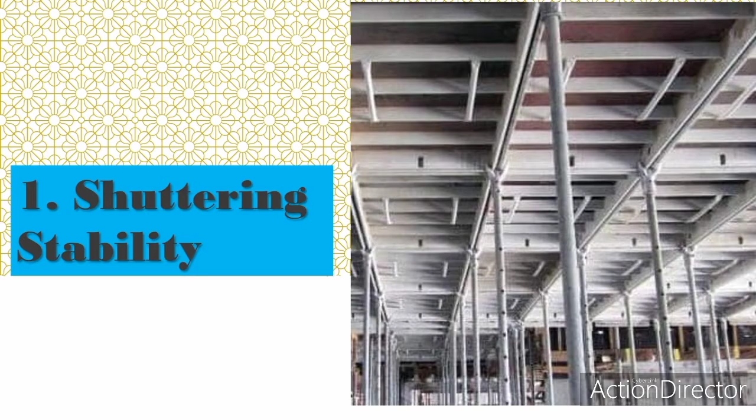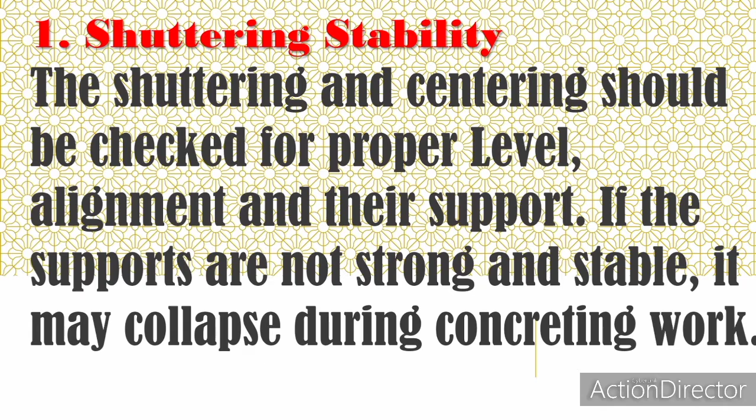The shuttering and centering should be checked for proper level, alignment and their support. If the supports are not strong and stable, it may collapse during concreting works. This can be a serious safety concern and leads to wastage of time and material. Before and during concreting work, the supervisor should observe the stability of all shuttering and centering supports.

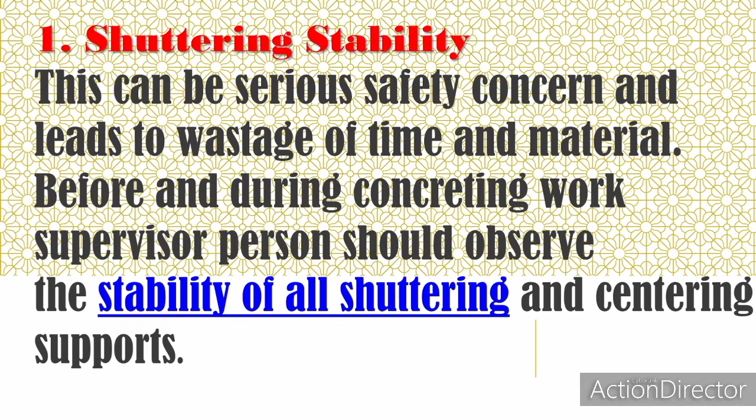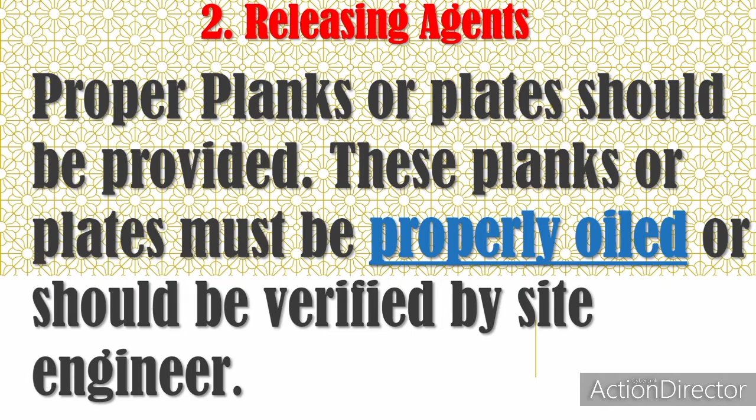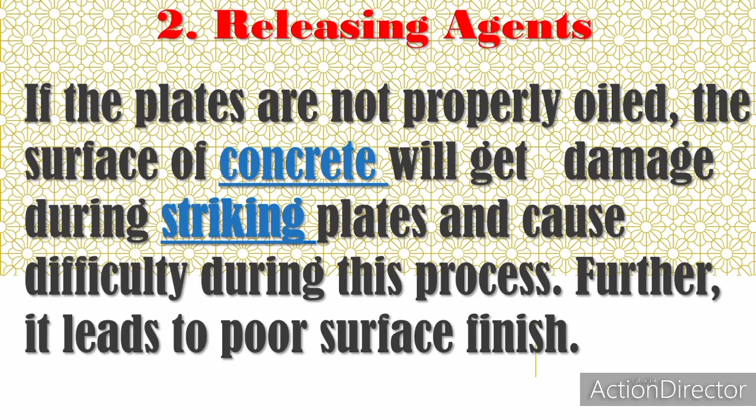Second, releasing agents. Proper planks or plates should be provided. These planks or plates must be properly oiled or should be verified by the site engineer. If the plates are not properly oiled, the surface of concrete will get damaged during striking plates and cause difficulty during this process. Further, it leads to poor surface finish.

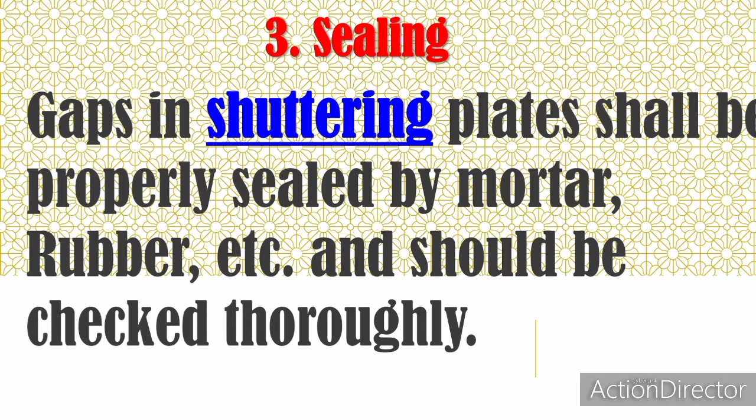Number 3. Sealing. Gaps in shuttering plates shall be properly sealed by mortar, rubber, etc. and should be checked thoroughly. If not sealed, it leads to leakage of concrete through gaps and gives improper finish.

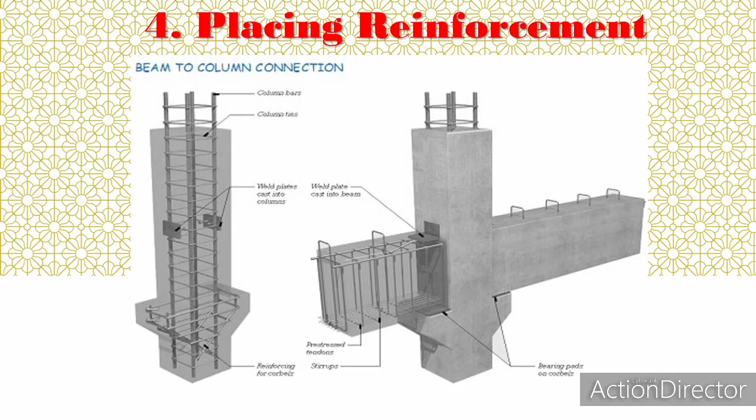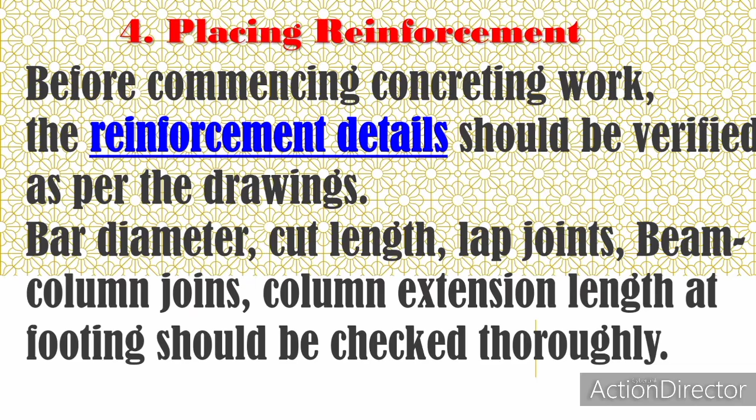Number 4. Placing reinforcement. Before commencing concreting work, the reinforcement details should be verified as per the drawings. Bar diameter, cutting length, lap joints, beam column joints, column extension lengths at footing should be checked thoroughly. Improper detailing and placing leads to poor functioning of structural elements or even collapse of the structures.

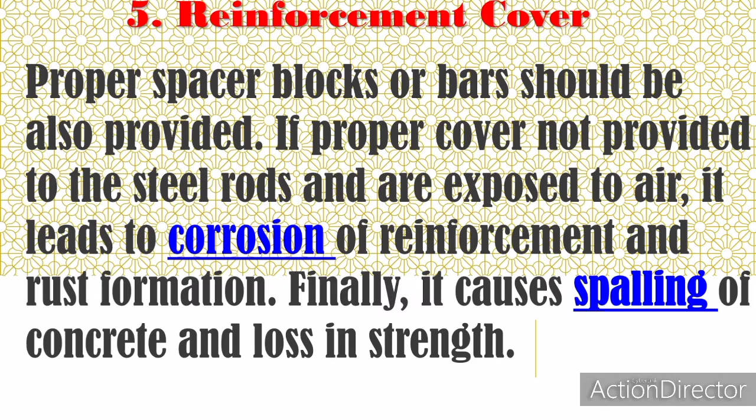5. Reinforcement cover. Reinforcement cover is one of the most important aspects of concrete work. The reinforcement bar should not be exposed to atmosphere and the minimum recommended cover should be provided. Proper spacer blocks or bars should also be provided. If proper cover is not provided to the steel rods and they are exposed to air, it leads to corrosion of reinforcement and rust formation. Finally, it causes spalling of concrete and loss in strength.

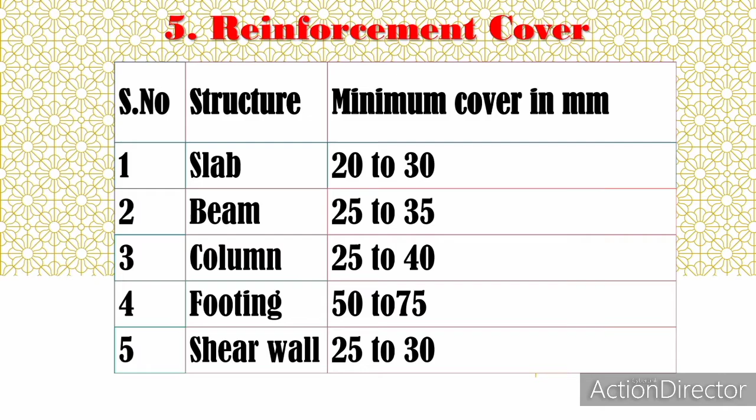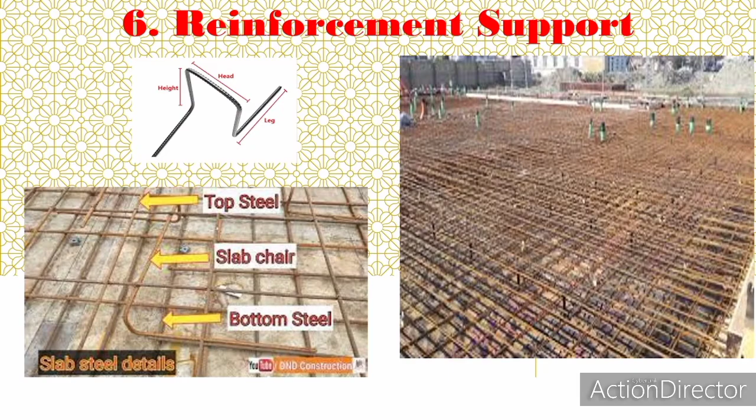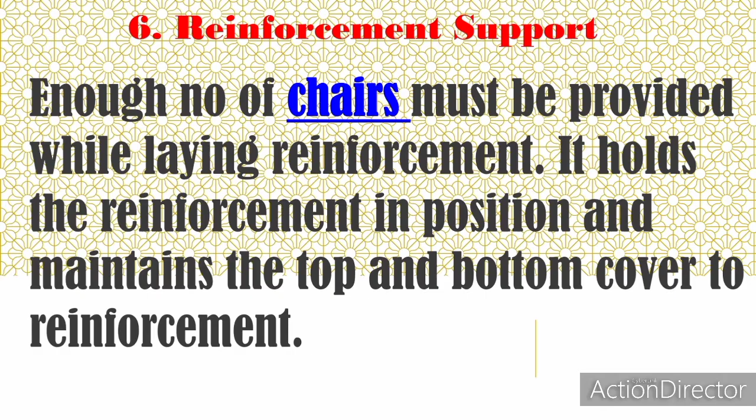Enough number of chairs must be provided while laying reinforcement. It holds the reinforcement in position and maintains the top and bottom cover to the reinforcement. If enough chairs are not provided, the rods may get disturbed or the spacing of rods will not be uniform. During concreting work, the reinforcement loses its position.

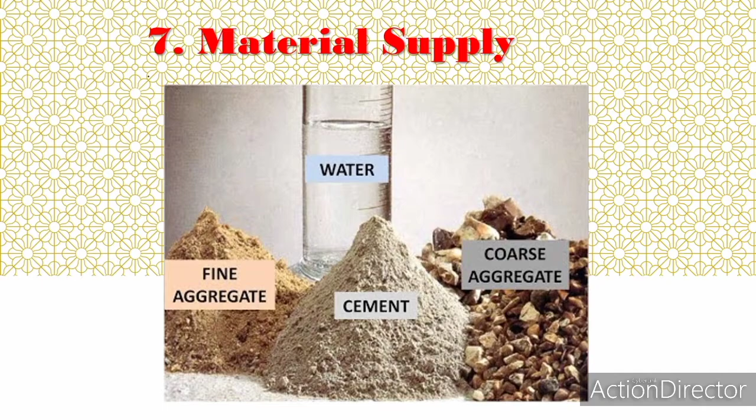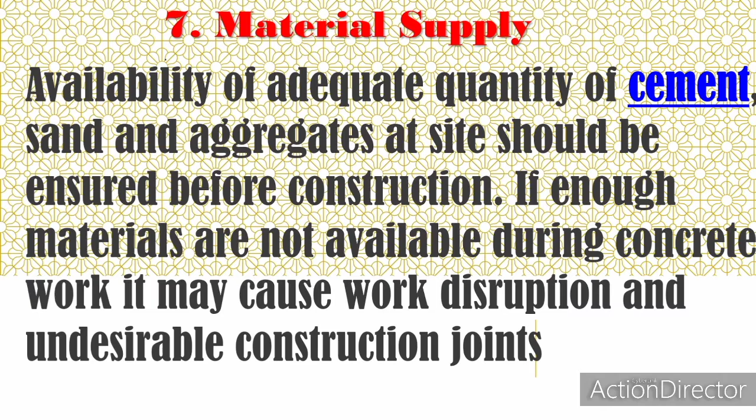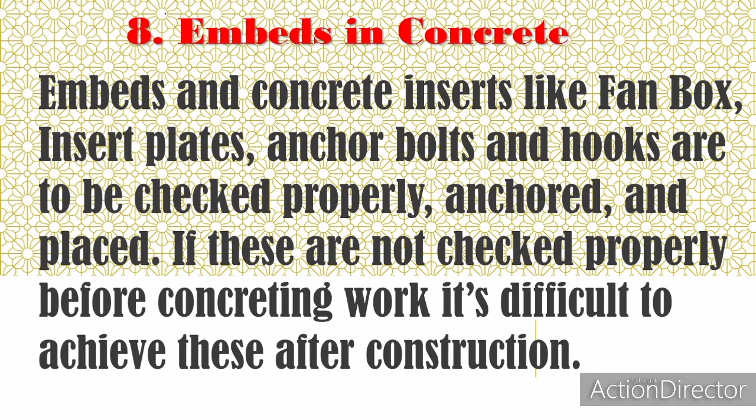Number 7. Material supply. Availability of adequate quantity of cement, sand and coarse aggregate at site should be ensured before construction. If enough material is not available during concreting work, it may cause work disruption and undesirable construction joints. Number 8, embeds in concrete. Embeds and concrete inserts like fan box, insert plates, anchor bolts and hooks are to be checked properly, anchored and placed. If these are not checked properly before concreting work, it's difficult to achieve these after construction.

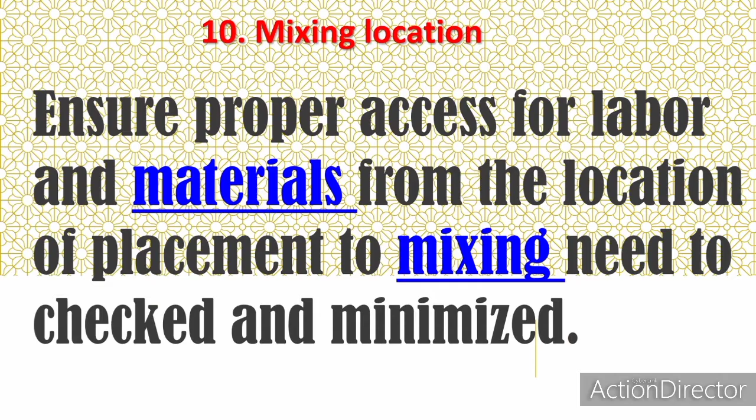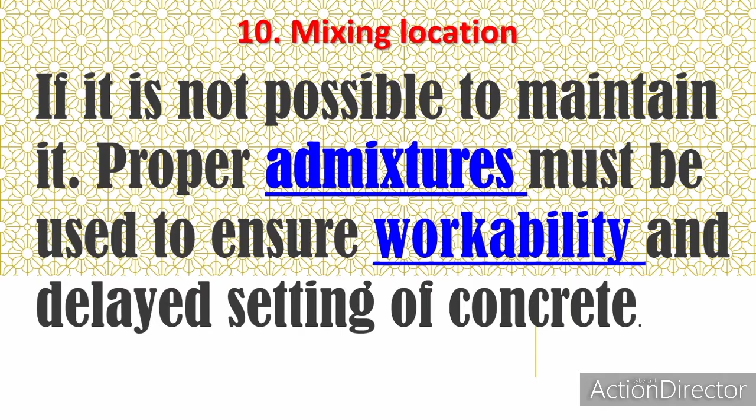Number 10, mixing location. Ensure proper access for labor and materials; the distance from the location of placement to mixing needs to be checked and minimized. If the distance is not maintained, it can slow down the work, reduce the workability of concrete and affect setting of concrete. If it is not possible to maintain it, proper admixtures must be used to ensure workability and delayed setting of concrete.

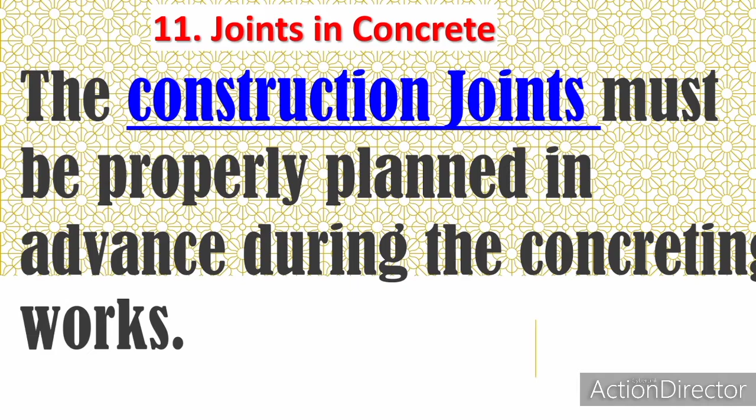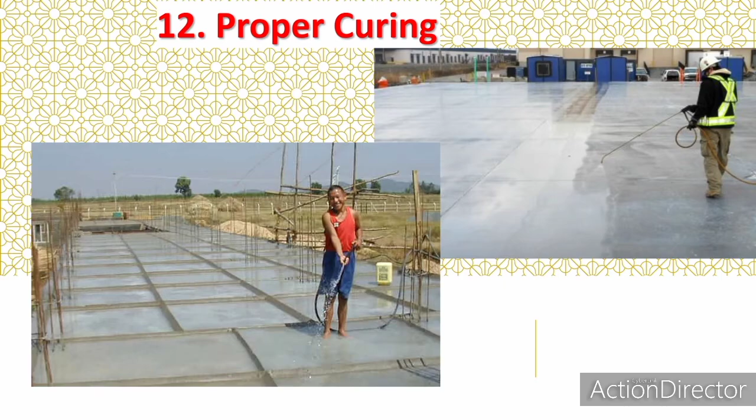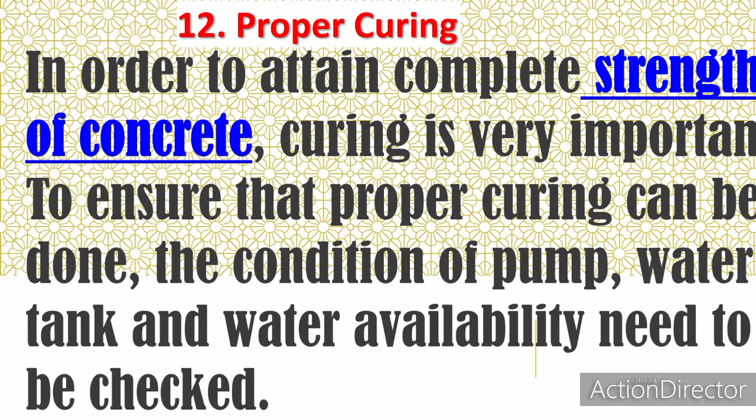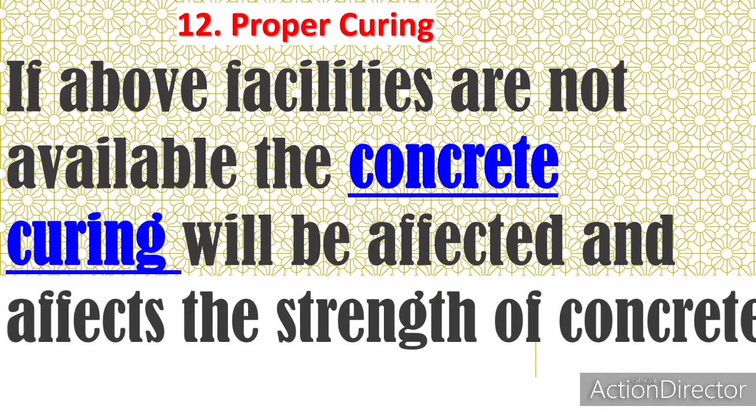Number 11, joints in concrete. The construction joints must be properly planned in advance during the concreting works. If not planned well, concrete may have cracks in the surface, loss in structural integrity, and poor durability. Number 12, proper curing. In order to attain complete strength of concrete, curing is very important. To ensure that proper curing can be done, the condition of pump, water tanks and water availability need to be checked. If the above facilities are not available, the concrete curing will be affected and affect the strength of concrete.

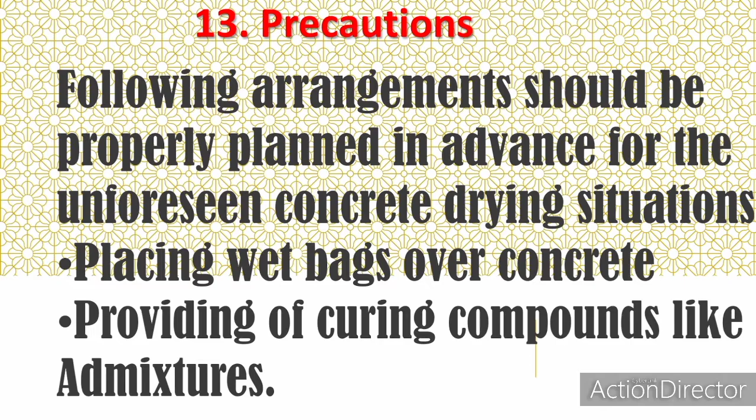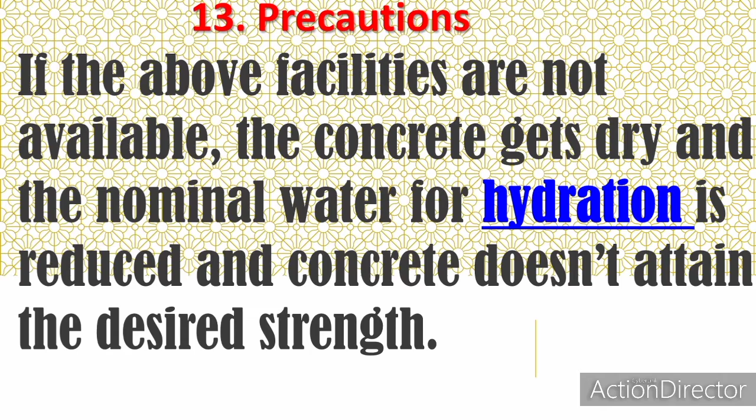Precaution. Number 13. The following arrangements should be properly planned in advance for unforeseen concrete drying situations: placing wet bags over concrete, providing curing compounds like admixtures. If the above facilities are not available, the concrete gets dry, the nominal water for hydration is reduced and the concrete does not attain the desired strength.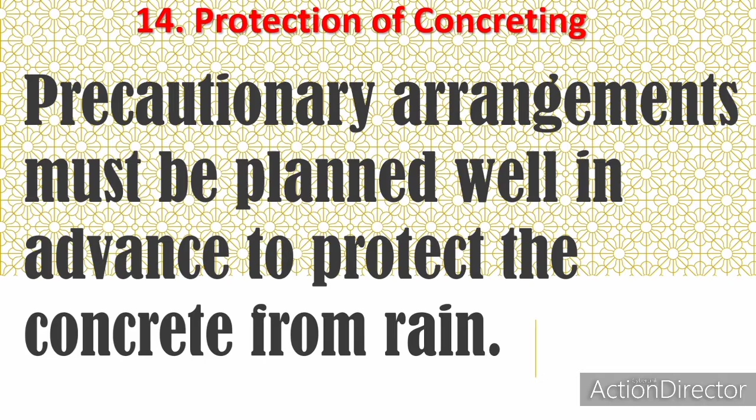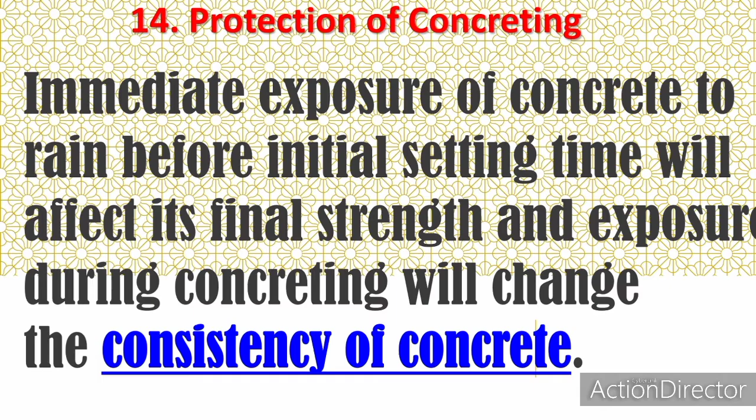Number 14. Protection of concreting. Precautionary arrangements must be planned well in advance to protect the concrete from rain. Immediate exposure of concrete to rain before initial setting time will affect its final strength, and exposure during concreting will change the consistency of concrete.

Number 15. Pouring of concrete and compaction. The pouring height of concrete should not be more than 1 meter or 3 feet in order to avoid segregation. If the distance is more than 1 meter, it leads to segregation in concrete and leads to voids in the concrete work. After pouring, concrete must be properly compacted and finished.